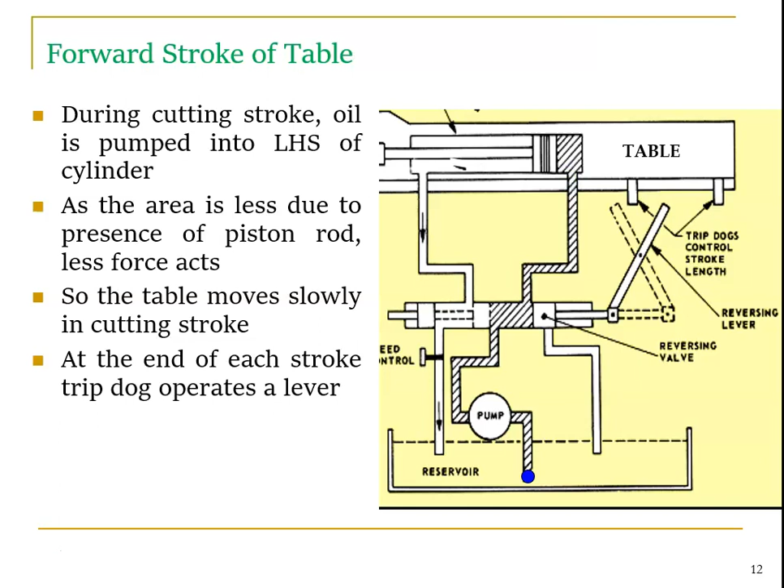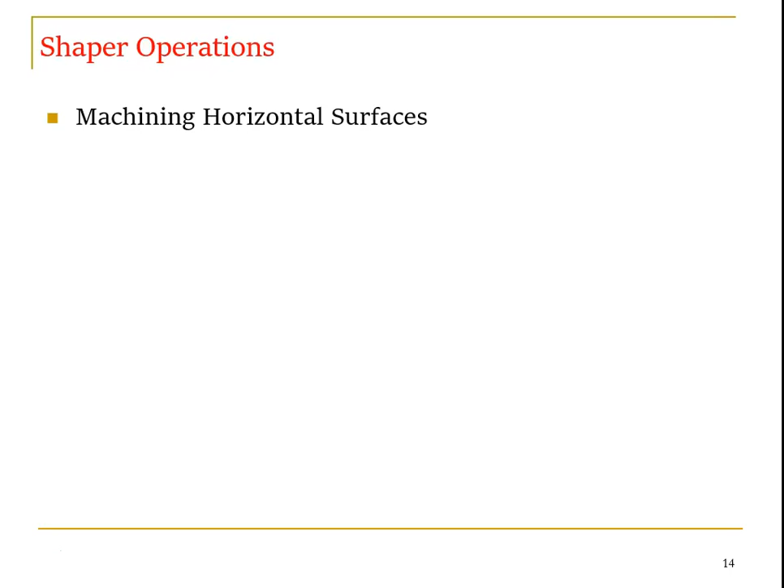So the next topic is what are the operations we are going to perform using shaping. Normally we know slots, keyway, grooves. Machining a horizontal surface, vertical surface, angular surfaces, cutting slots, grooves and keyways. Machining irregular surface is also possible, but we need some attachments. Machining splines or cutting gears, splines is something like a curvature shape. We will see one by one.

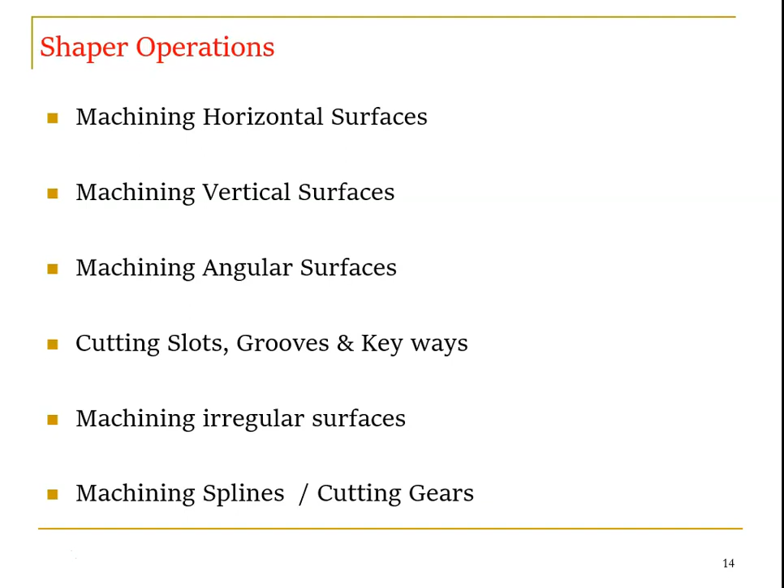Steps for machining: work is properly held in the vise, fixed on the table.

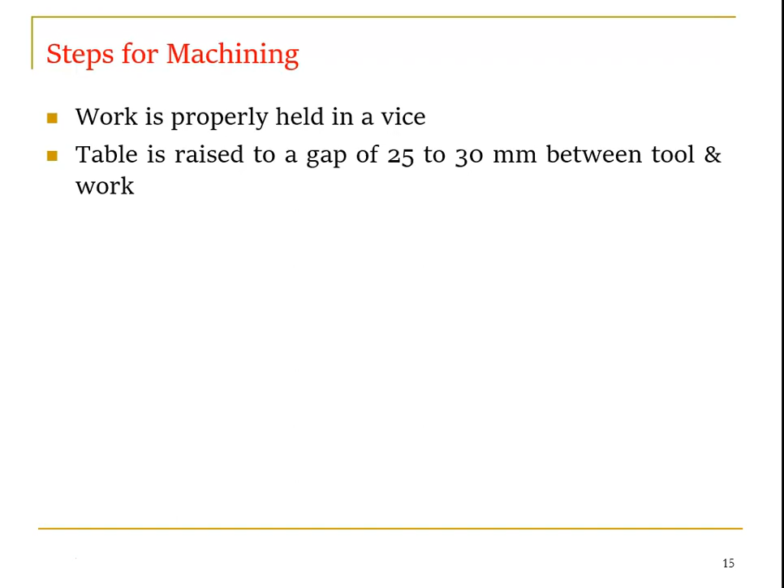Table is raised to a gap of 25-30 mm between the tool and work, so the table is moved up.

The length and position of the cutting stroke are adjusted, so length, stroke and position all are adjusted.

The length of stroke should be nearly 20 mm longer than the work piece length.

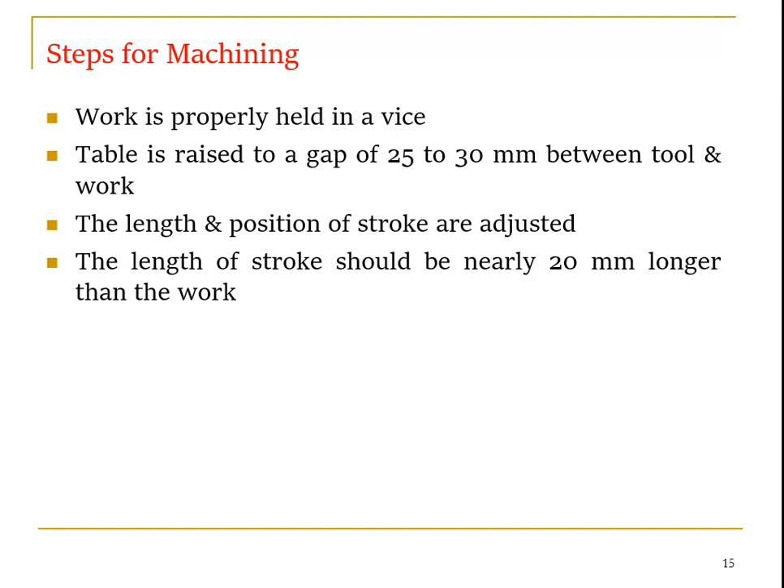The approach and overrun should be 10 to 5 mm respectively.

Depth of cut is adjusted by rotating down the feed screw of the tool head, giving the required depth of cut.

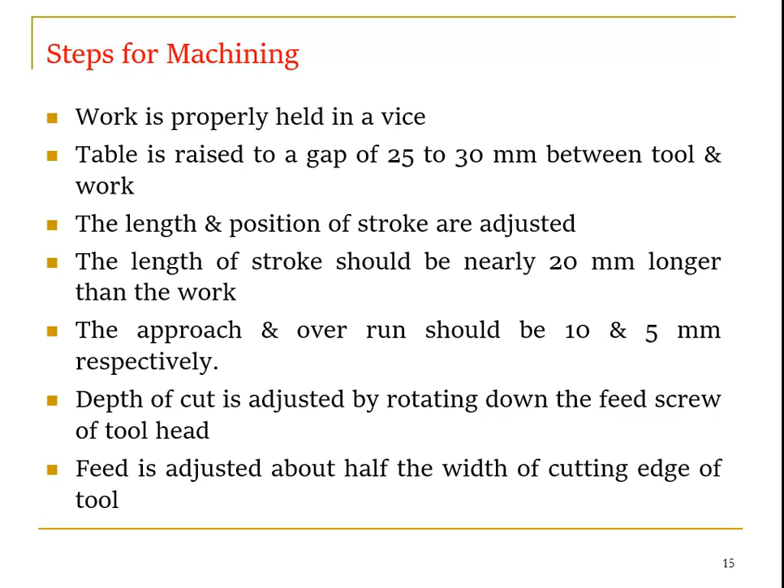Feed is adjusted by half of the width of the cutting edge of the tool, based on the tool's movement. This is for a horizontal surface.

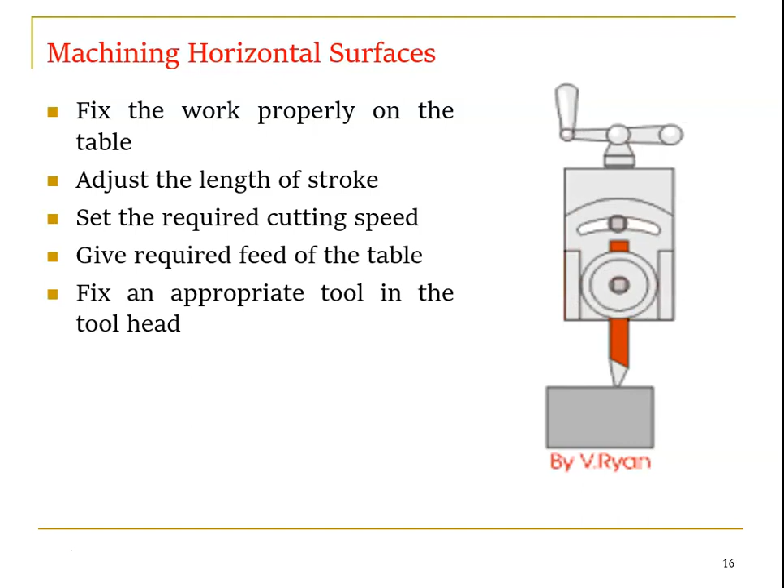Fix the work properly on the table, adjust the length of the stroke, set the required cutting speed, give required feed of the table, fix an appropriate tool in the tool head, give suitable depth of cut for rough cuts, finish the job by giving less depth of cut.

So we give rough cut and finishing cut. The tool moves reciprocally in horizontal direction.

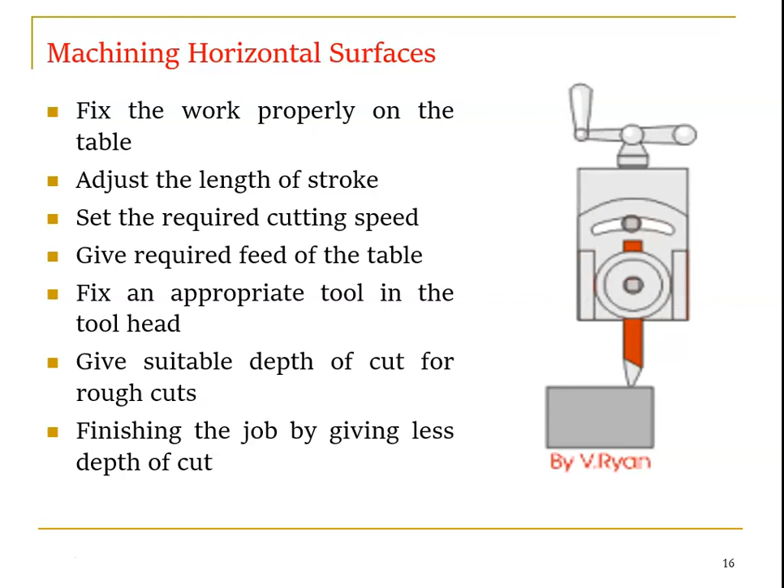That's it. Vertical surface machining is similar to horizontal, only the tool post can move vertically, given by manual feed here.

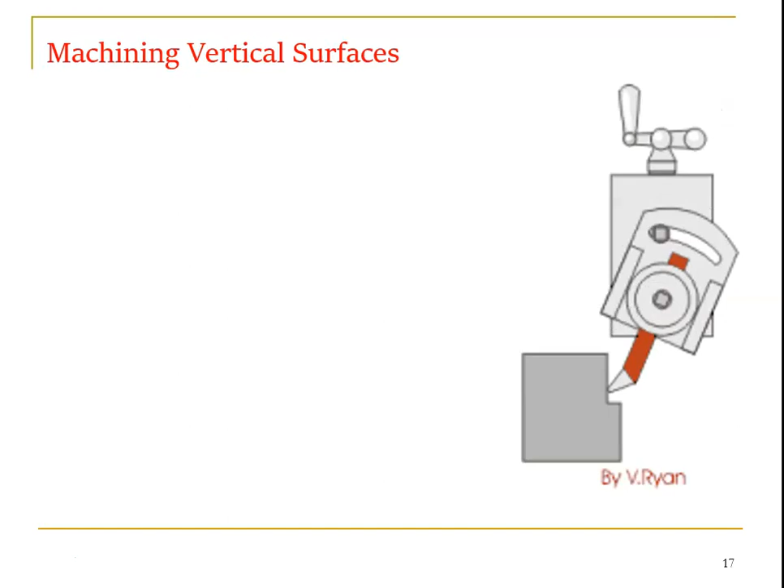Fix the job on the table, align the surface to be machined properly, fix a side cutting tool in the tool head, set the vertical slide exactly at zero, set the apron away from the job, switch on the machine, rotate down feed screw by hand to give down feed.

So the down feed is given, feed is about 0.25 mm.

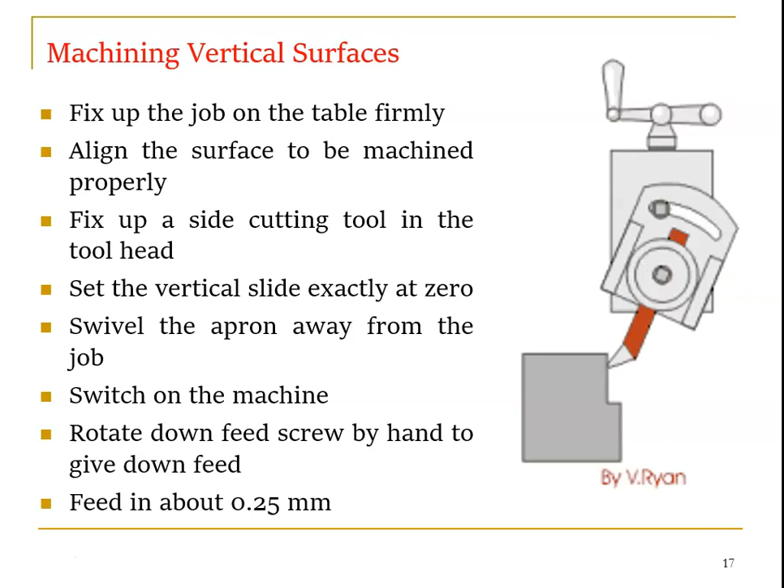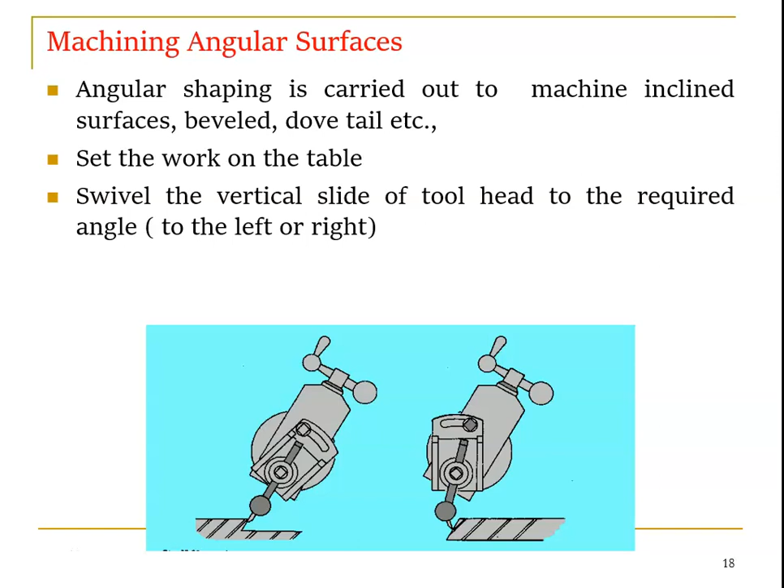Set the work on the table and tilt the tool post as per our required angle, and it will move left or right. Set apron away, give down feed as per the requirement.

This is rack and pinion, rack or splines.

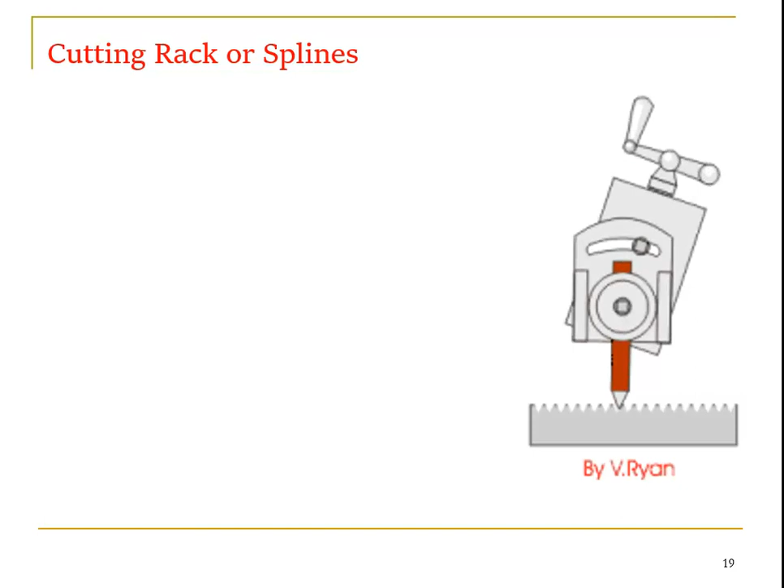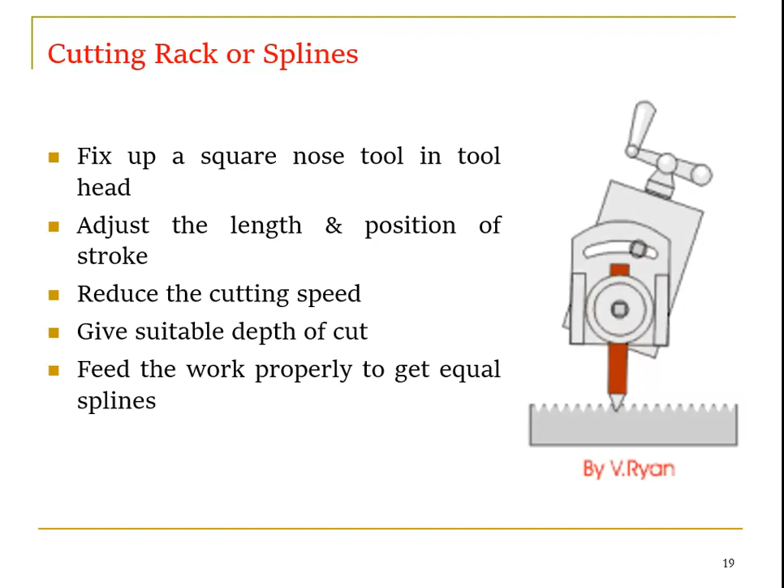The feed given here is manual. Fix the square nose tool in the tool head, adjust the length and position of the stroke, reduce the cutting speed, give suitable depth of cut, feed the work properly to get equal splines.

The next one is cutting keyways. We have keyways, similar keyways we can use.

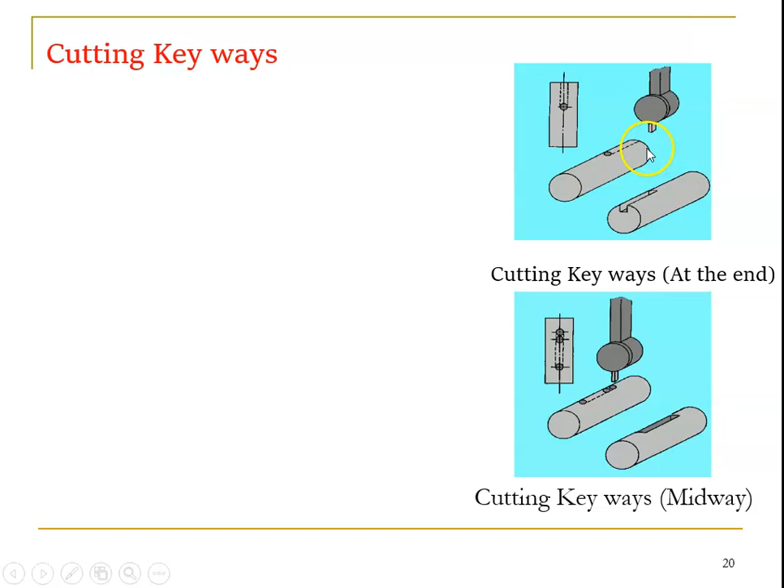Again fix the job, spline similar to the keyway. Move, rotate the work by the required amount, use indexing plate for this purpose.

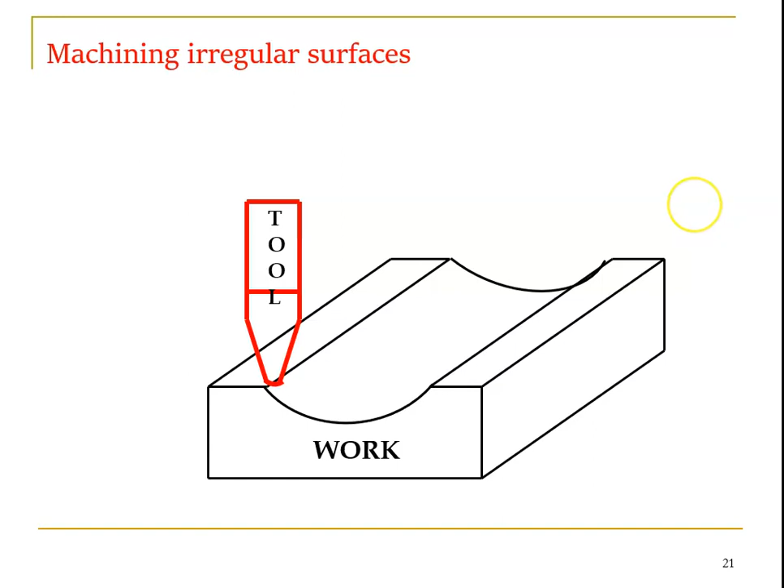This is for irregular surfaces. Fix up the forming tool in the tool post, give the cross feed, adjust the apron suitably.

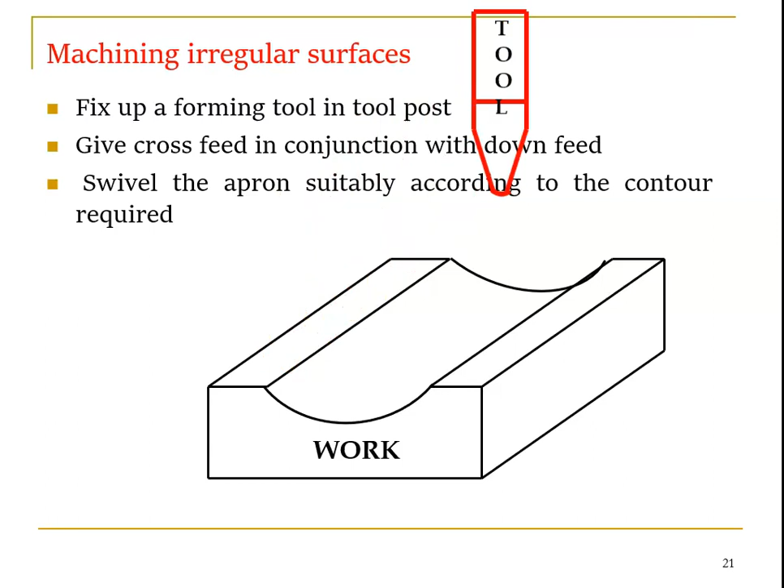Irregular means we give varying feed according to the shape we need. These are some of the operations performed on a shaping machine.

Next we see work holding devices, generally used to hold the work properly on the table. There are 5 methods.

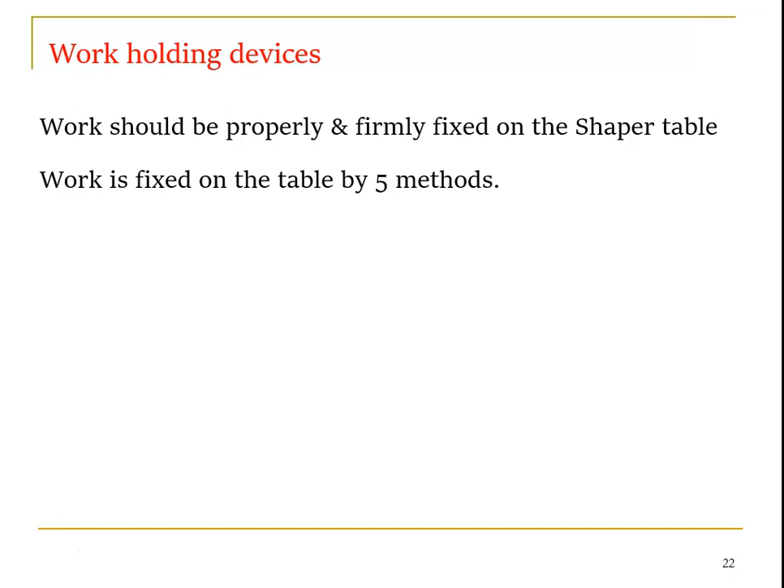One is clamping in a vise - for holding work piece in vise there is plain and universal type. Clamp on table using T-bolt, clamps, stop pin, toe dogs, strips.

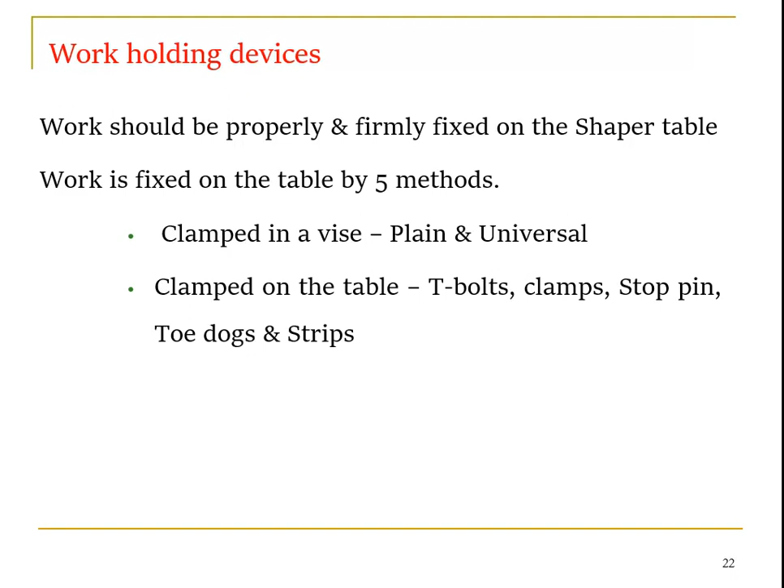Clamp it to the angle plate. Clamp it on the V-block. Held between shaper and index center. So these are some of the work holding devices. So this one is the vise, the machine vise. One jaw is movable, another one is fixed.

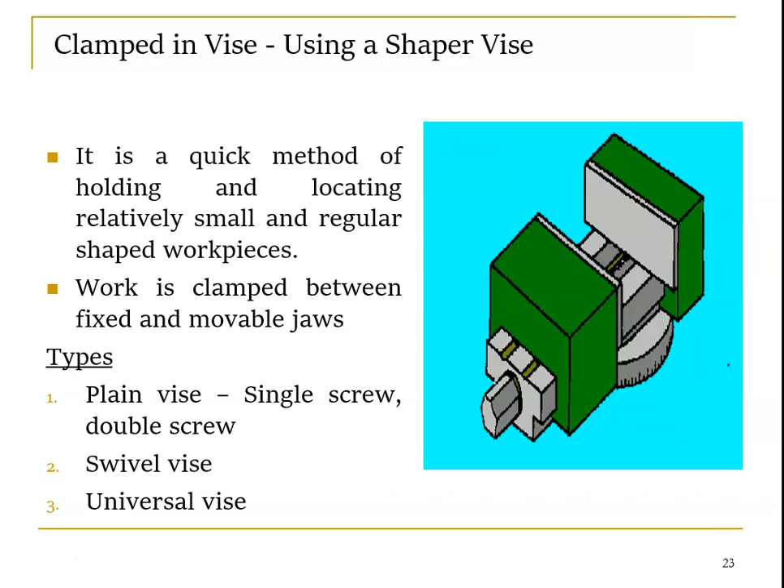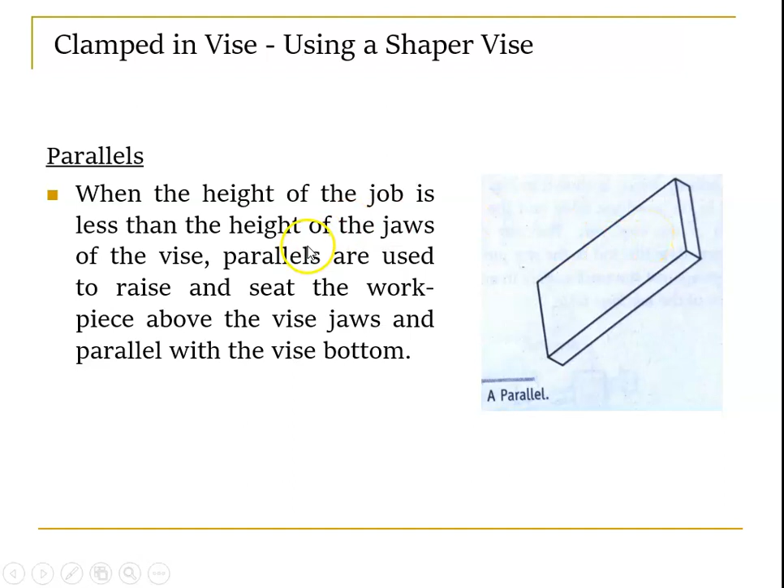So this is similar to our parallel. When the height of the job is less than the height of the jaws of the vise, parallels are used. This is a rectangular block, that's all. To raise and seat the workpiece above the vise jaws and parallel with the vise bottom. Right. So we have T-bolts and clamps. They have T heads that are fitted in the T slots.

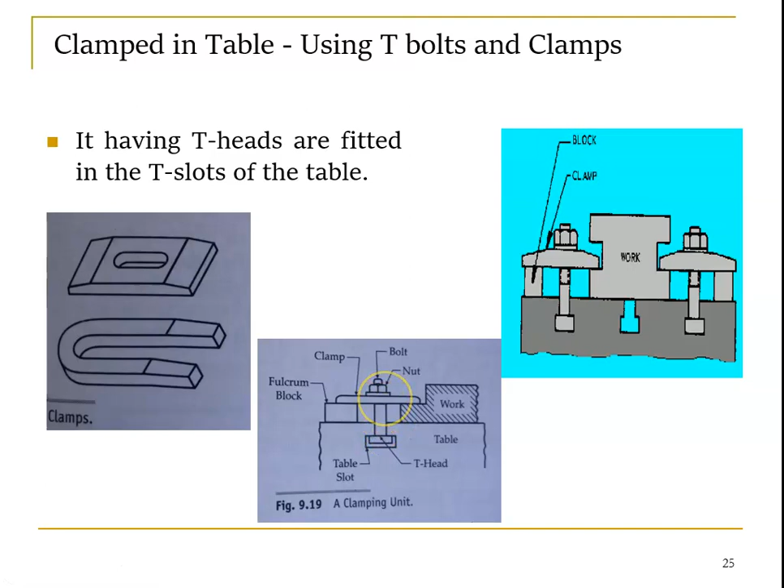Right. The next is clamping on the table using stop pins.

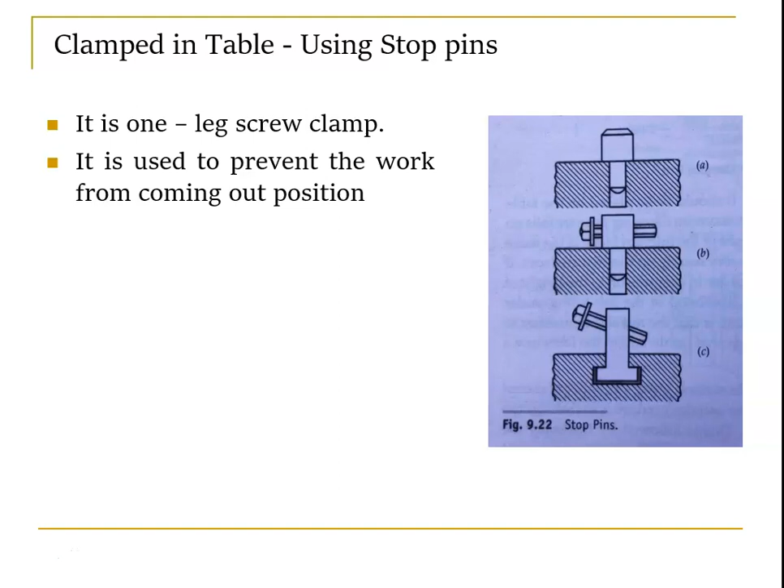The same way, it is a one leg screw. It is used to prevent the work from coming out of position, so that it does not move beyond a level, we use stop pins. Again we have toe dogs. They are used along with the stop pins in order to hold thick workpiece material.

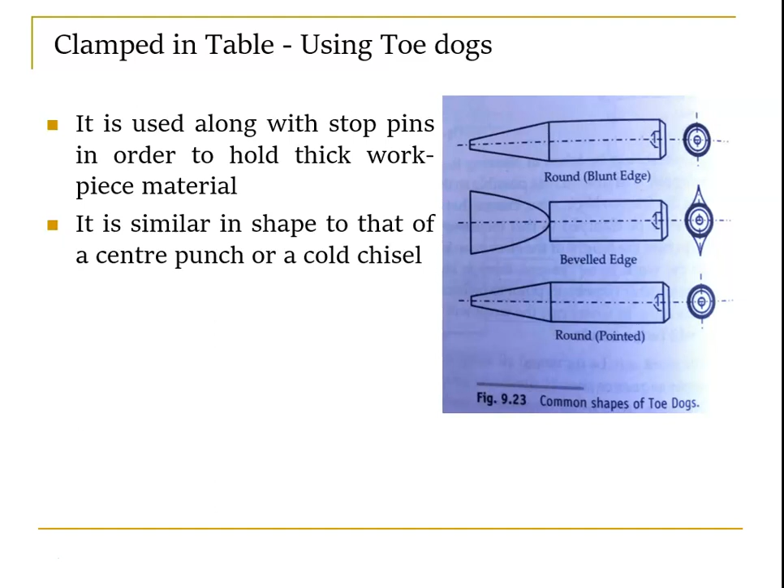So this is similar to our centers, like the centers used in the lathe. It is shaped like a center punch or chisel. Again, it's a T-bolt using a stop pin and toe dogs. So we have a table.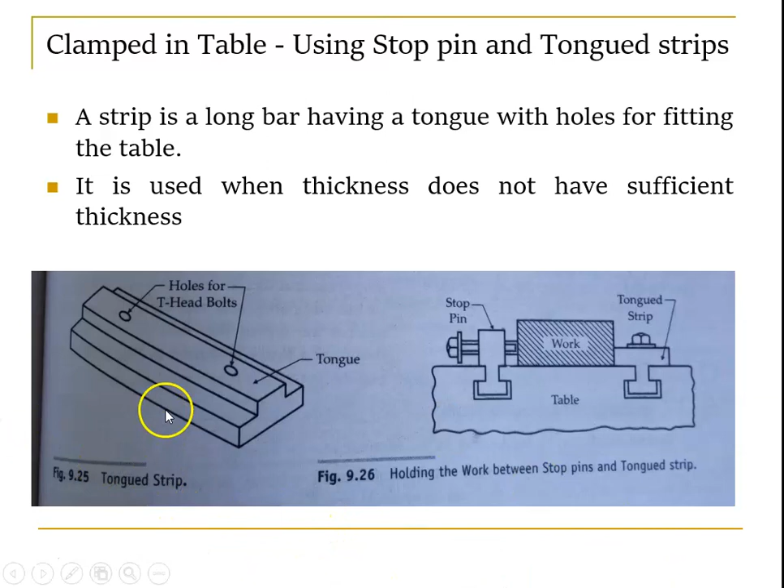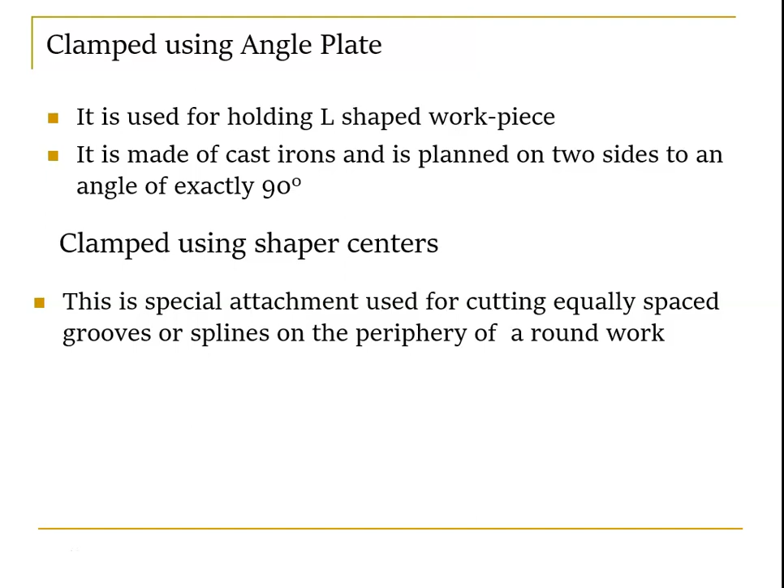Shaper centers are a special attachment used for cutting equally spaced grooves or splines on the periphery of round work. So a shaper center is a special attachment. Again, V-block, it is used for holding round workpieces. So these are some of the work holding devices.

Next, shaper tools. The cutting tool used in the shaper is a single point cutting tool.

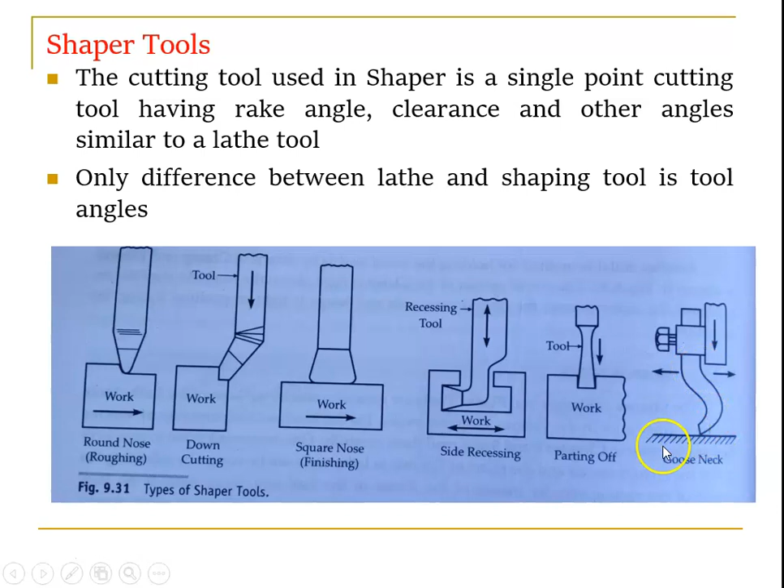Again, these are some of the different types of tools used in shaping. Okay, so what are the advantages? For shaping we have a variety of advantages, like the setup is very quick and easy and can be readily changed from one job to another. So setup is very easy, we can easily adapt, we can easily change. The work can be held easily. The single point cutting tool is generally inexpensive.

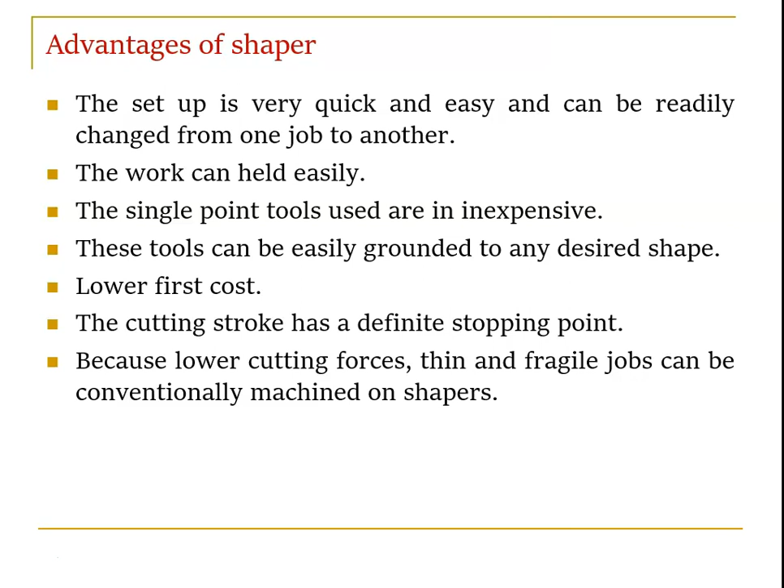So these tools can be easily ground to any desired shape. Lower first cost. Cutting stroke has definite stopping point. So cutting tool வந்து definite stopping point இருக்கும், because of lower cutting force thin and fragile jobs can be conveniently machined on shapers. So these are some of the advantages.

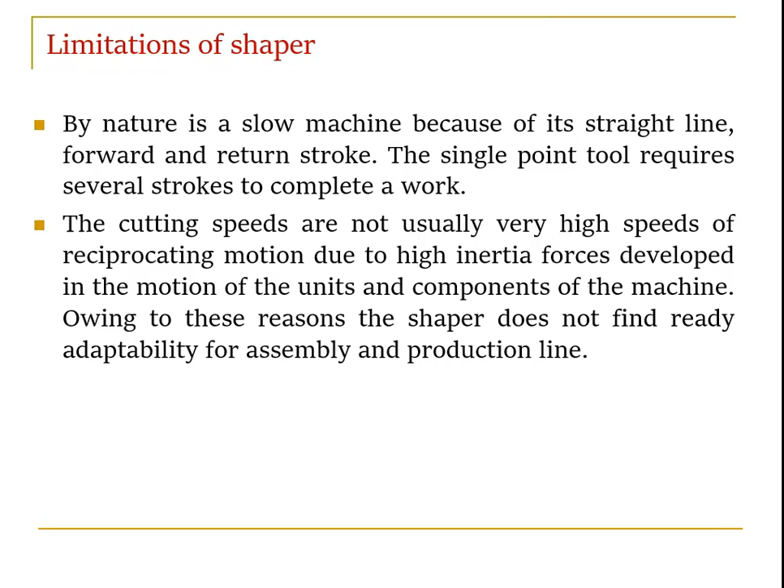Okay, the final is the process parameters. So number one is cutting speed. It is the rate at which the metal is removed by the cutting tool. So எவ்வளோ ஸ்பீடில் வந்து நான் மெட்டல் ரிமூவ் பண்ணுறேன். It is also defined as the linear speed of strokes in meters per minute, which depends on the number of ram strokes per minute and length of the stroke.

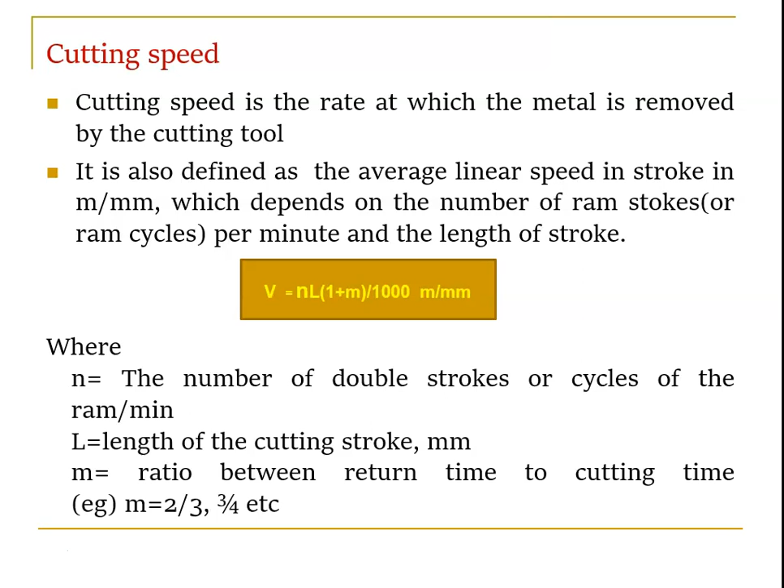Right, so where N equal to number of double strokes or cycles of the RAM, L equal to the length of stroke, M equal to the ratio between return time to cutting stroke time. So normally M equal to 2 by 3, 3 by 4, etc. The next parameter is feed and depth of cut. So feed is the relative motion of the workpiece in a direction perpendicular to the axis of the reciprocating ram per double stroke.

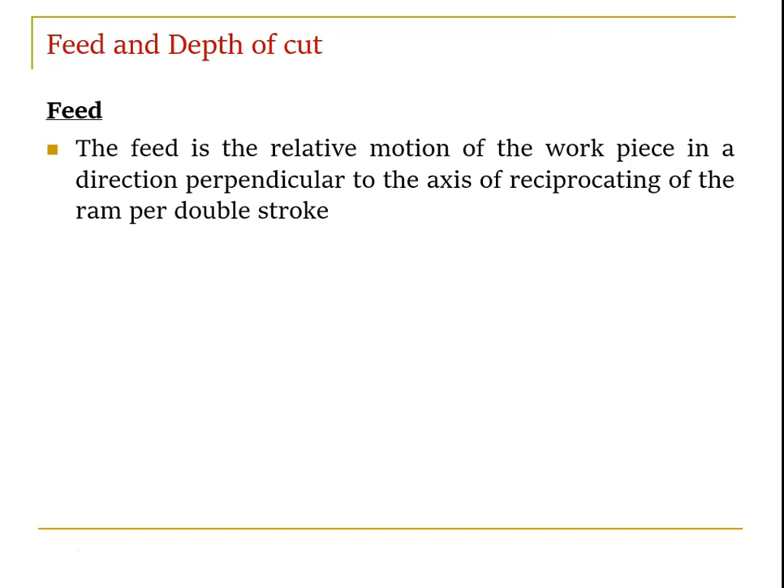The feed is relative motion of the workpiece in a direction perpendicular to the axis of reciprocating ram. Axis இப்படி இருக்கும், feed வந்து இப்படி இருக்கும், ரெண்டுமே 90 டிகிரி per double stroke. It is expressed in mm. Depth of cut அப்படின்றது thickness of material removed in one cut. It is the perpendicular distance measured between the machined surface and non-machined surface of the workpiece. Again, it is also expressed in mm.

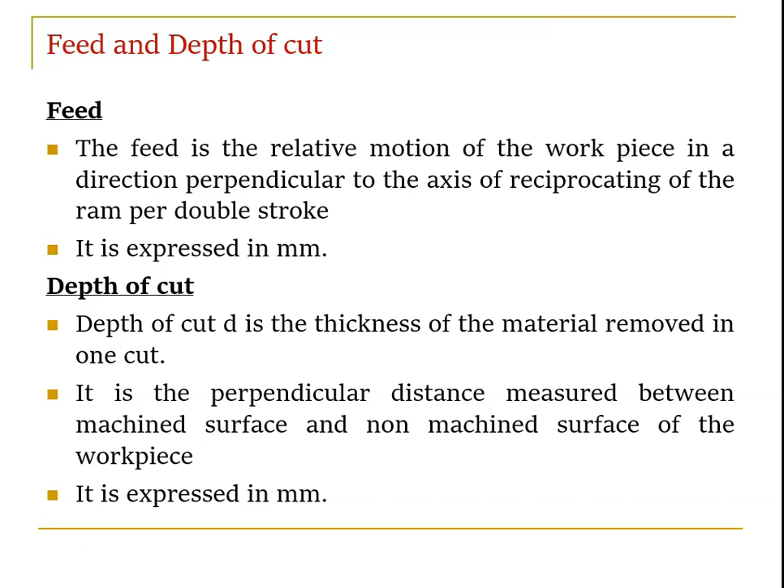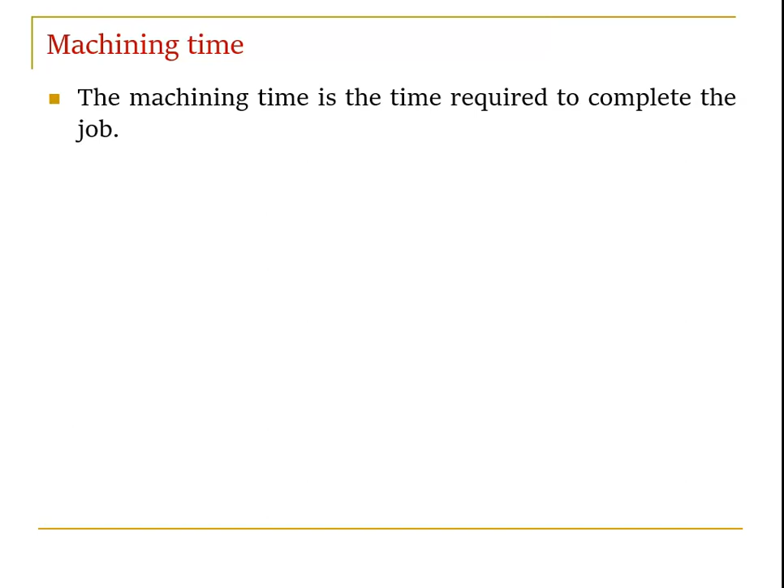The final parameter is machining time. The time required to complete one job. ஒரு job complete பண்றதுக்கு எவ்வளவு டைம் வருதோ அதான் machining time. The machining time is the time required to complete the job. It is calculated by first the time taken to complete one double stroke.

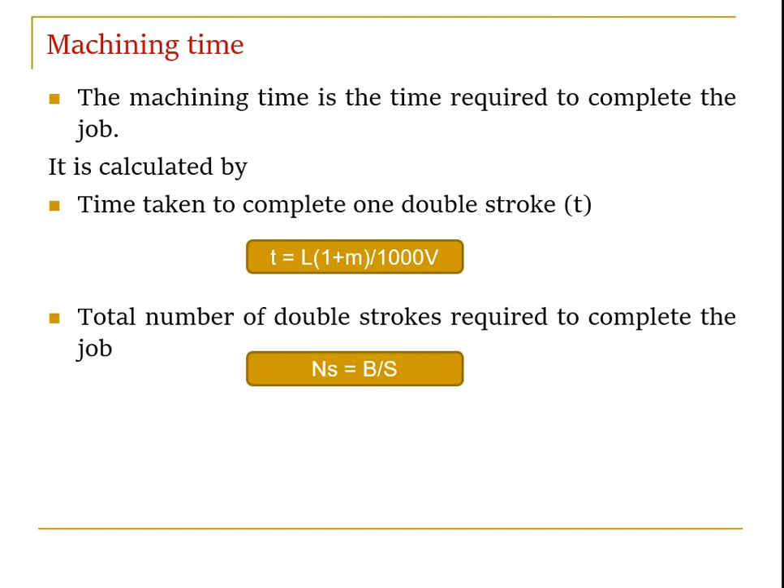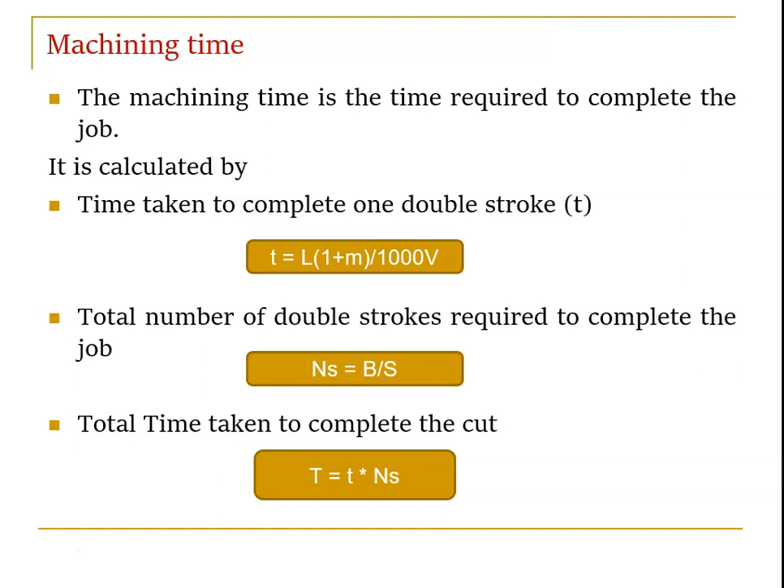Where L equal to length of cutting stroke, B equal to breadth of the work, M equal to ratio between the return time to cutting time, V equal to cutting speed, S equal to feed. So these are the formulas to calculate machining time.